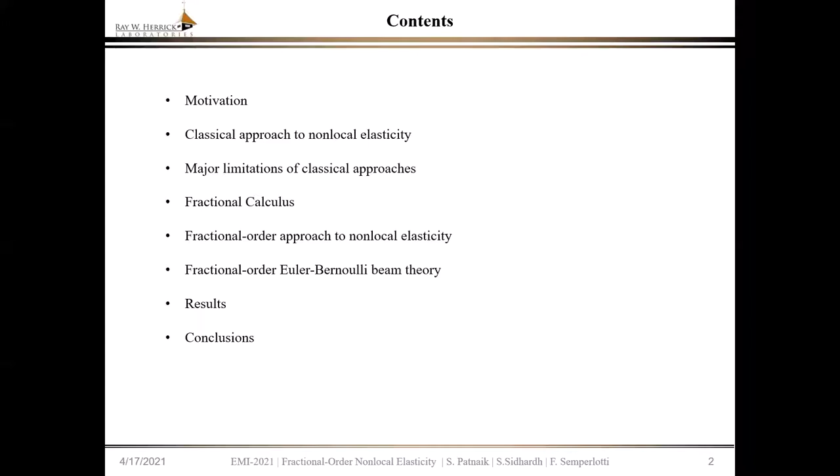Now, experimental investigations have shown that size-dependent effects or non-local effects are prominent in the response of several structures. Generally speaking, the importance of non-locality in micro and nanostructures has been thoroughly investigated in literature, motivated by the apparent presence of atomic interactions, van der Waals forces, and surface stresses.

So micro and nanostructures, which are typically made from graphene sheets or carbon nanotubes, for example, find very important applications in sensors, atomic devices, surface probes, and even biological implants. Now, the effect of non-locality, particularly due to atomic interactions, is not pronounced in macrostructures. So hence the analysis of non-locality in macrostructures has been rather limited.

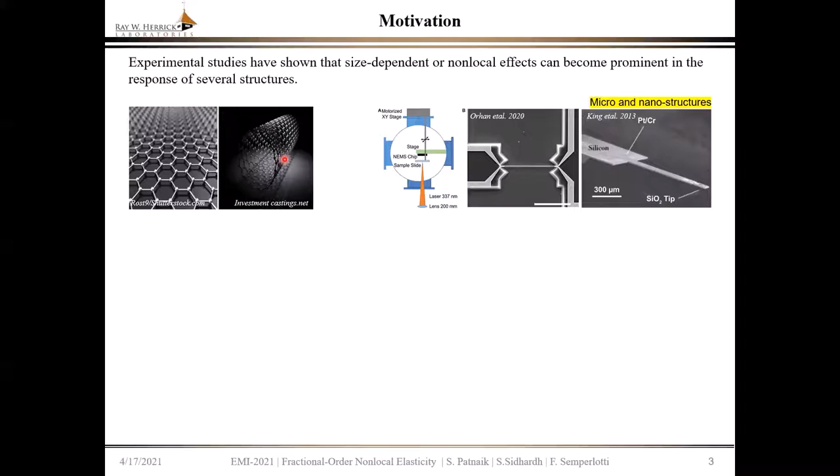In recent times, the analysis of non-local effects in macrostructures has also gathered importance and pace. So non-locality in macrostructures has been typically connected to the presence of material heterogeneity. In fact, Professor Bazant has this famous paper on size-dependent effects in concrete. And similarly, we have functionally graded materials, which find very important applications in hypersonic structures.

And non-locality has even begun to be used to analyze the softening and stiffening of aircraft panels, which lead to localized buckling, for example, in this stiffened panel of the B-52 bomber. And very recently, Zhu and his co-workers proposed this concept of intentionally engineered non-local designs, wherein they used long-range connections hard-coded in the geometry to develop non-local metastructures, and they use these non-local metastructures for broadband vibration attenuation.

So to conclude, non-locality has a very important role to play in present day complex structures, and hence the analysis and proper characterization of this non-local behavior is very important in the many applications that we discussed.

So in the classical approaches to non-local elasticity, the strain and stress at a given point within the non-local continuum are related by an integral convolution operator. This integral convolution operator is basically to account for the additional contributions within the horizon of non-locality, which is the characteristic volume beyond which there are no longer any non-local interactions. So there are two types of approaches: the strain-driven approach and the stress-driven approach.

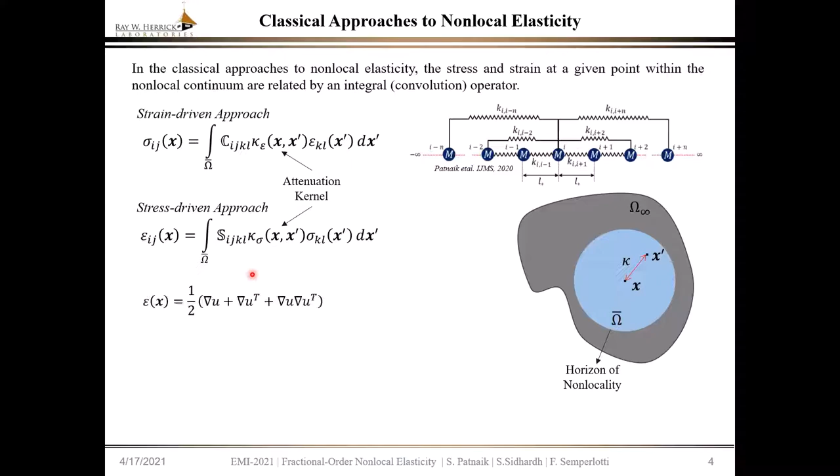So in the strain-driven approach, the stress is expressed as a convolution of the strains over the horizon of non-locality, and in the stress-driven approach, the strain is expressed as a convolution of the stresses over the horizon of non-locality. However, in both of these approaches, the definition for the strain is still the same as the local continuum mechanics. So to summarize, the strain-displacement relation is local and the stress-strain constitutive relation is non-local.

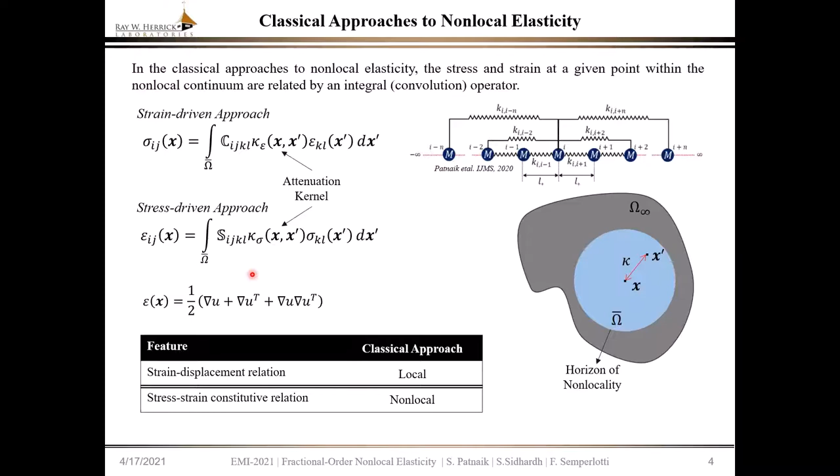Now, while these classical approaches to non-local elasticity have been able to address a multitude of aspects typical of non-locality, some challenges still remain. In order to achieve a positive definite total strain energy, these classical approaches to non-local elasticity require that the attenuation kernel is symmetric in nature. This requirement of symmetry limits the application of the resulting theory to several practical cases.

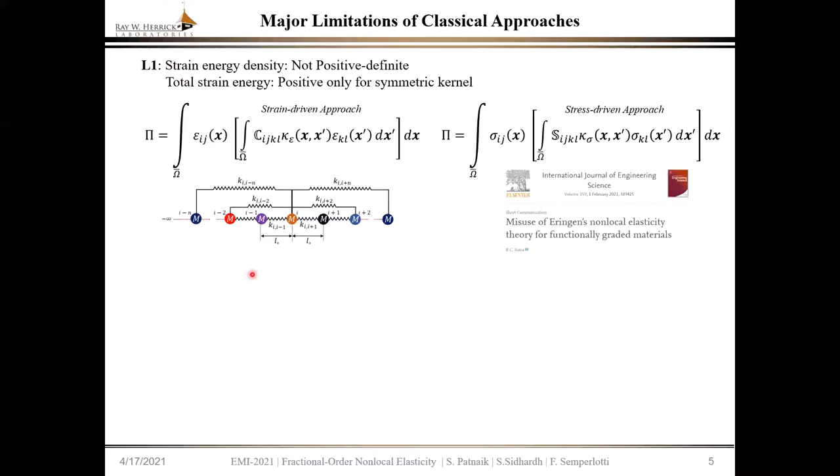For example, a heterogeneous collection of atoms where the non-local interactions about a certain atom are not symmetric. This can be found in, for example, functionally graded materials, and in fact, this was also highlighted recently in a paper by Professor R.C. Batra.

And the second major limitation of these approaches is that the strain-driven approach leads to a Fredholm integral equation of the first kind. And this equation does not have solutions. And whenever it has solutions, these solutions are not unique in nature. So these lead to inconsistent, or sometimes called paradoxical, predictions for certain slender structures under different boundary conditions.

The typical example is that of the cantilever beam, where we see that increasing the degree of non-locality does not lead to a significant impact on the response of the non-local beam, where we expect that there would be a significant softening with the increase in the degree of non-locality. Now, this issue was addressed by the stress-driven integral approach, but the limitation of the stress-driven integral approach stems from its numerical implementation.

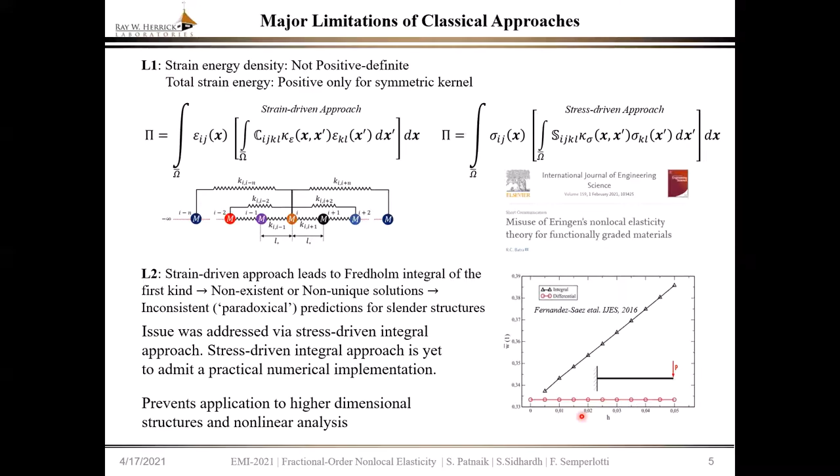Till date, there has been no practical numerical implementation of the stress-driven approach, which prevents its application to higher dimensional structures and nonlinear analysis. Now, in this study, we used fractional calculus to address these limitations. So, fractional order operators allow the differentiation and integration of any function to any real order. Several definitions exist for fractional derivatives.

In this study, we use the Caputo definition because by using the Caputo definition, we recover integer order essential boundary conditions, which have a clear physical interpretation. The same cannot be said for other definitions of fractional derivatives. Now, a closer look at the definition of the Caputo derivative suggests that it consists of the convolution of local information over a memory interval with the attenuation kernel.

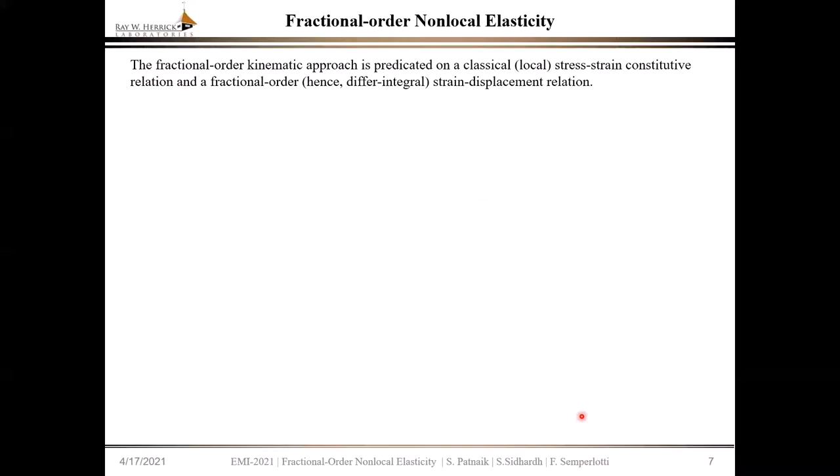Now, the left-handed derivative captures the information which lies behind the point, and the right-handed derivative captures information which lies ahead of the point. And the combination of these two derivatives can be used to capture the information from the entire horizon of influence. So, unlike the classical approaches to non-local elasticity, the fractional order approach to non-local elasticity is predicated on a local stress-strain constitutive relation and a fractional order strain displacement constitutive relation.

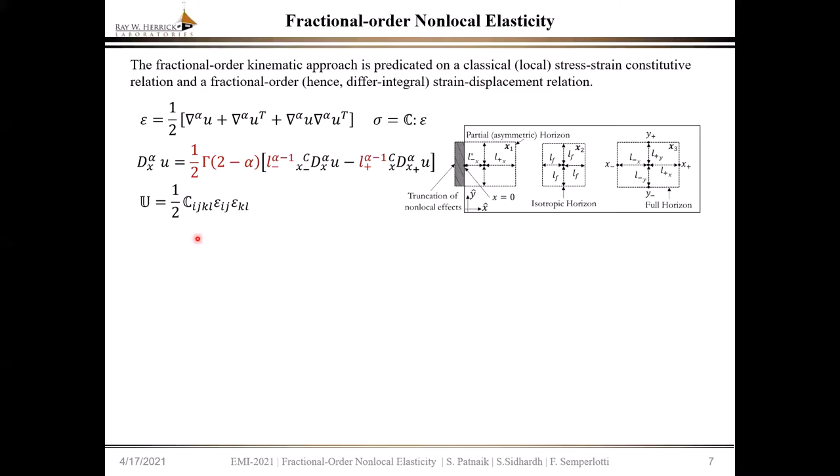Remarkably, the strain energy density which we obtain from this approach is positive definite irrespective of the nature of the kernel. And so this is the first advantage. And so we can use this fractional order model for heterogeneous structures by making suitable changes in the elasticity tensors. And the other thing, since the deformation energy is always positive definite in nature, the governing equations which are derived via variational simplifications are well posed in nature and give consistent predictions, which we will also show by the numerical results.

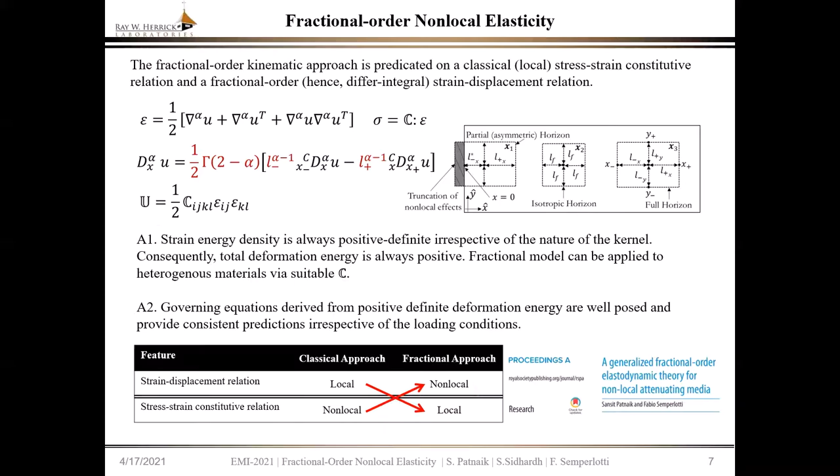So to summarize, in the fractional order approach, the strain displacement relation is non-local in nature, and the stress constitutive relation is local in nature. Basically, we flipped this from the classical approaches. So while we discuss this more from the point of view of energy, a more detailed approach based on defining fractional order deformation gradient tensors and using them to derive this expression for the strain can be found in this paper. Now we use the fractional order non-local theory to model non-local Euler-Bernoulli beams.

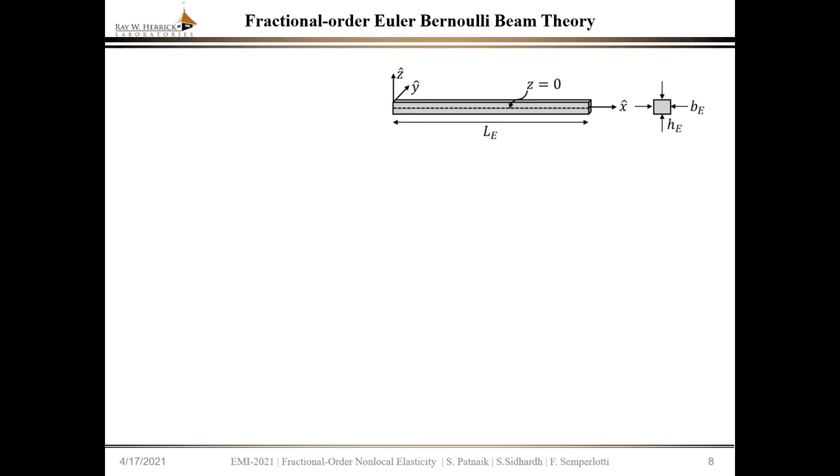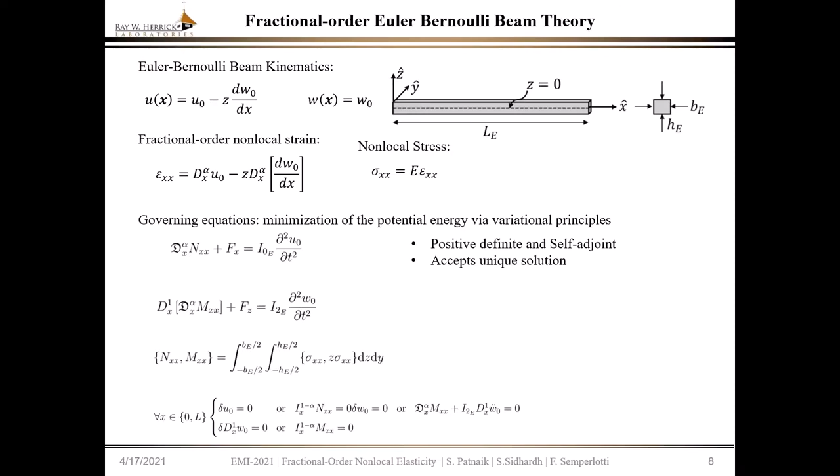We use the Euler-Bernoulli beam kinematics to derive the fractional order strain and the fractional order stress, and then by using variational principles, we obtain the governing equations. They are well posed in nature and admit a unique solution, which we have shown in this paper in IJSS. And then we simulated the fractional order governing equations via the fractional order finite element approach, which we also developed in this paper in IJSS.

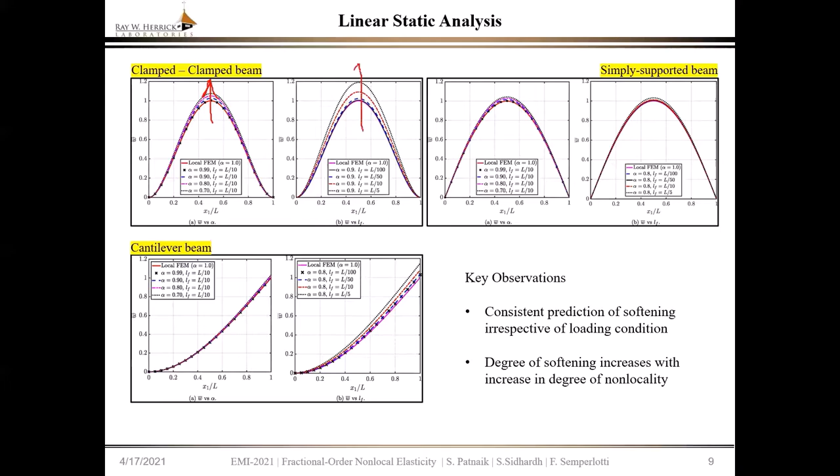We observed that irrespective of the nature of the boundary conditions, we see a consistent softening effect. By increasing the degree of non-locality, that is by reducing alpha, we see a consistent softening, or by increasing the length scale, that is increasing the size of the horizon, also we see a consistent softening. Now, the ability of the fractional order approach to achieve a finite element implementation also enabled a nonlinear analysis, unlike the stress-driven approach. Here also we observed a consistent softening with increase in the degree of non-locality.

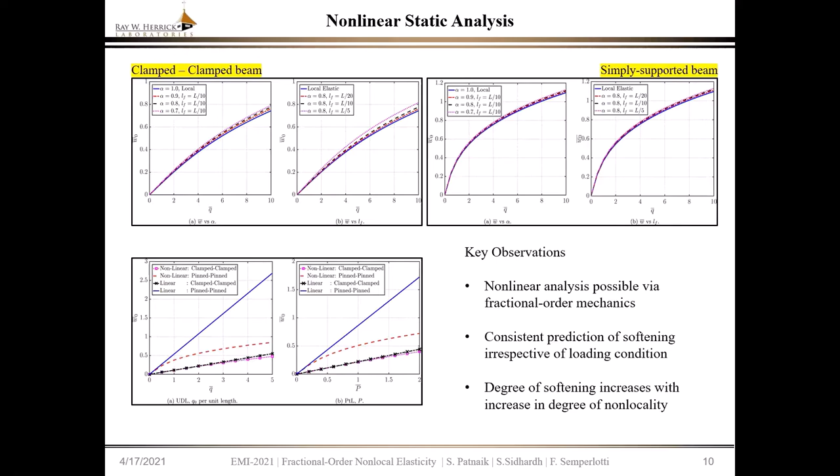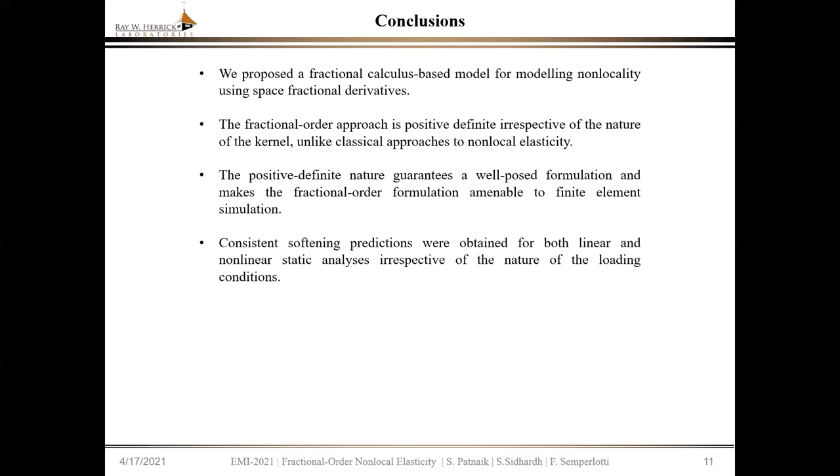So now I can conclude my presentation by highlighting that we developed a fractional order approach to non-local elasticity, which was positive definite in nature, irrespective of the nature of the kernel, and guarantees a well-posed formulation amenable to finite element simulations. Using this formulation, we obtain consistent softening predictions for both linear and nonlinear static analysis, irrespective of the nature of the boundary conditions.